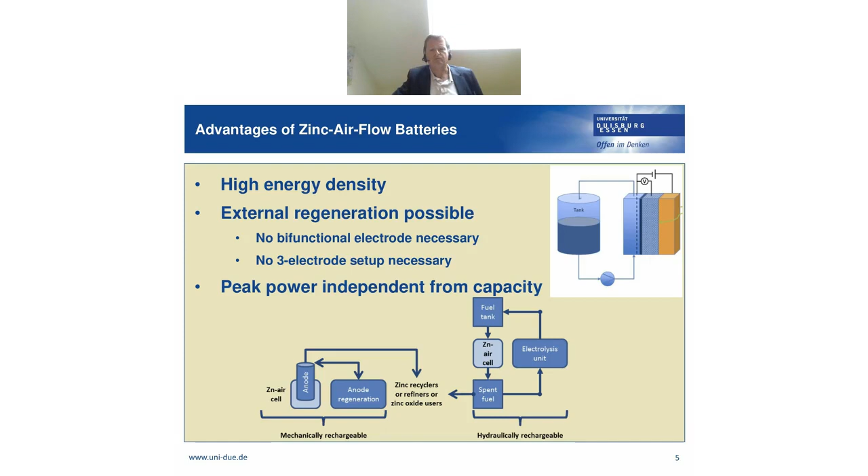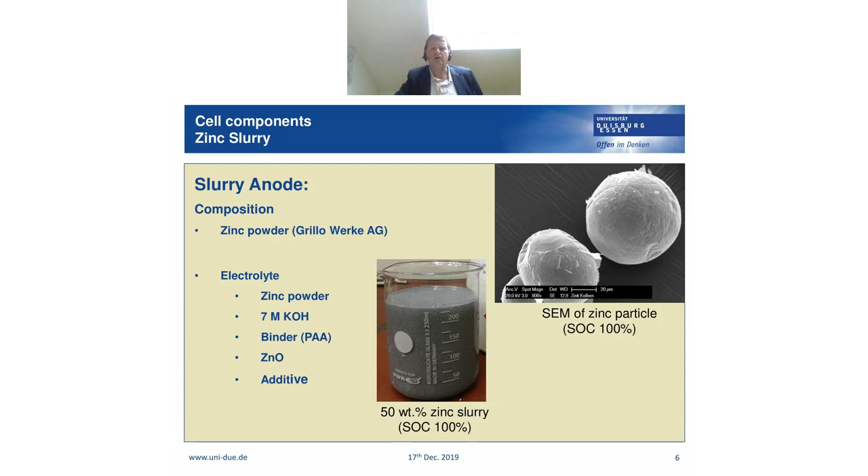Our electrolyte is made up of the zinc powder, and it's an alkaline electrolyte. We mainly use 7 molar potassium hydroxide, and the electrolyte is stabilized with the help of a binder. Mainly we use PAA, polyacrylic acid, and we add some zinc oxide for the purpose of suppressing hydrogen evolution. And sometimes we add one or two additives to improve the performance.

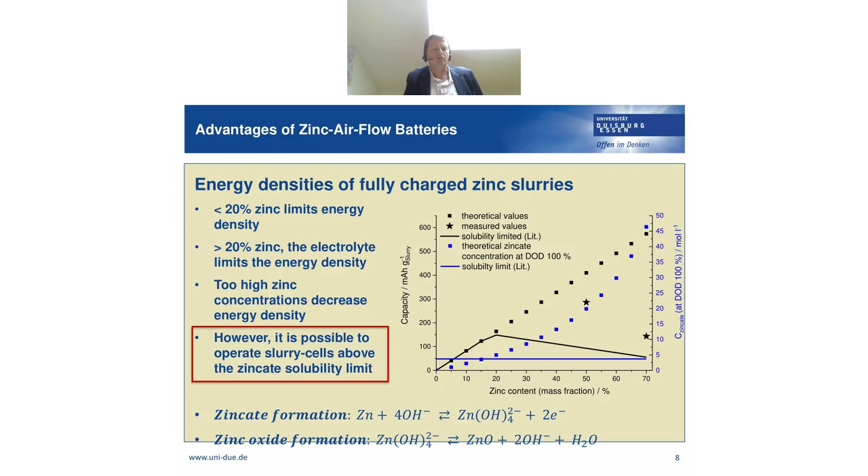So with our zinc slurries with 50 or 70 weight percent zinc, there's so much zincate produced, we cannot keep it in solution. So inevitably, our zincate will precipitate as zinc oxide. And this is really our approach, what we've done here in our group. And I will show you that it is possible to operate slurry cells well above the zincate solubility limit.

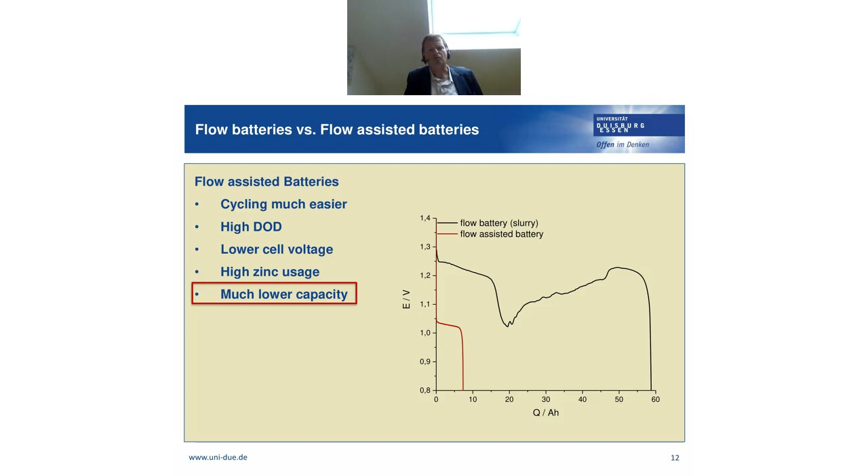And what is most striking, of course, is that the capacity in amp hours is much higher for the flow battery. As I've said to you, we have 50 weight % of zinc in the slurry, and we have, of course, less zinc available for the flow-assisted battery experiment, which is only around 8 amp hours. So this is the advantage of using flow batteries with slurries.

So flow-assisted batteries are easier to cycle. They have a stable discharge voltage, and flow batteries have a much higher energy density. Power and capacity are independent from each other, and they show a higher discharge voltage.

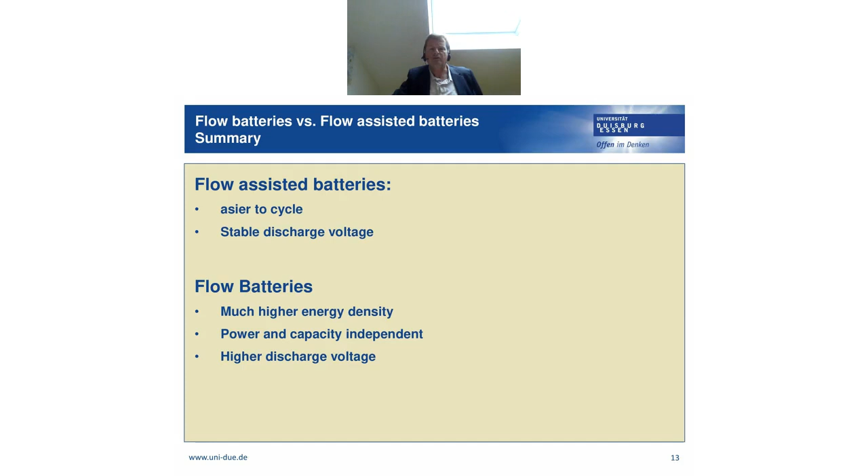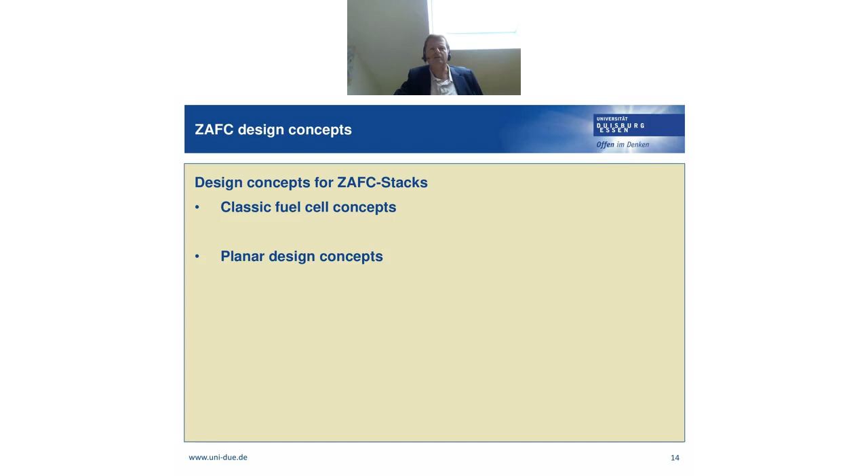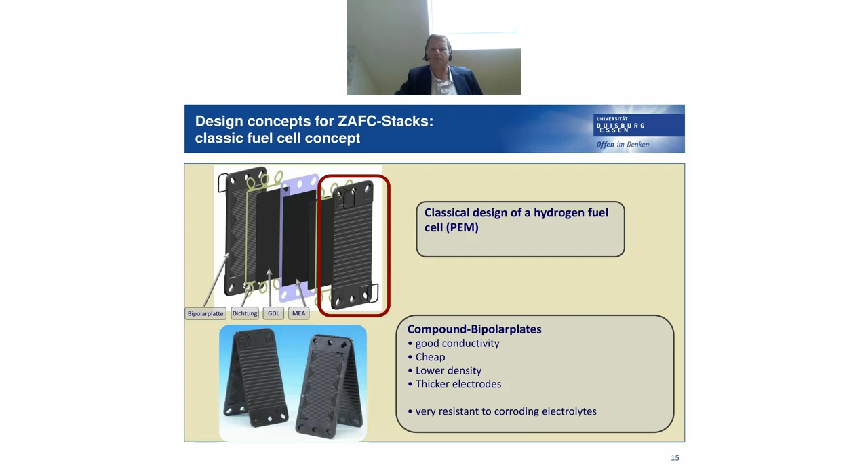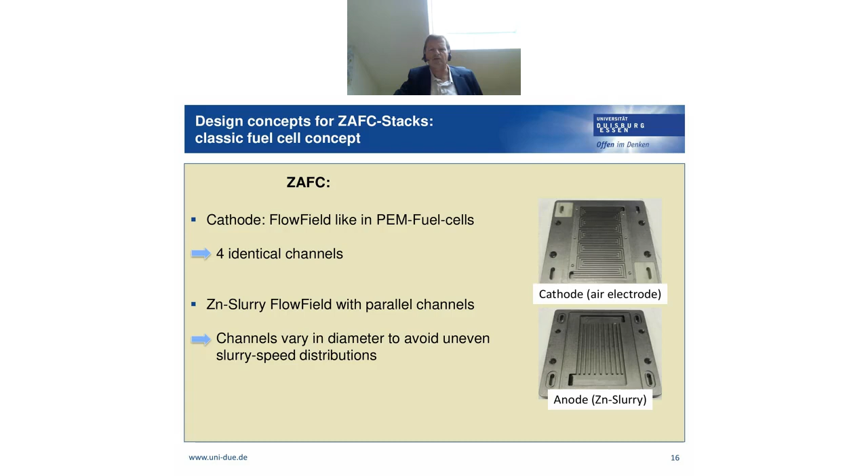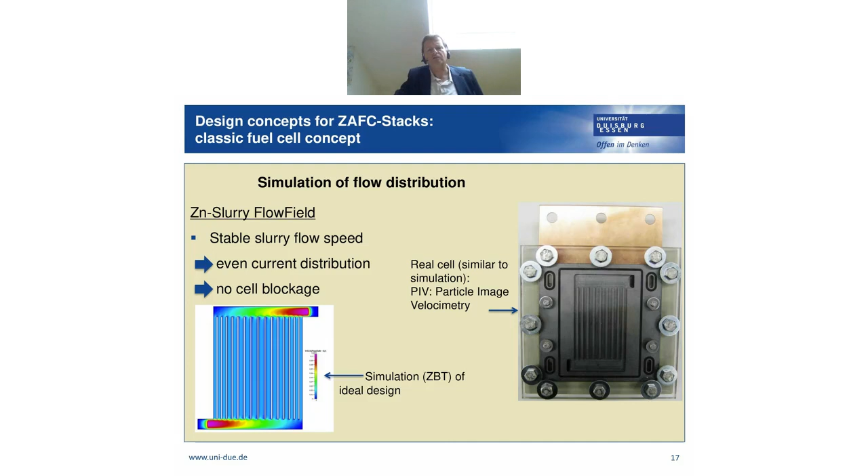We also studied the flow behavior with the help of the technique PIV, which is particle image velocimetry. This means one part, the cathodic part of the cell, is replaced just with a glass plate, and we pump a fluid, not our slurry, through the cell, and into this fluid we give seed particles, and with the help of these seed particles and laser flashes, the movement of these particles through the flow field can be recorded by a camera. So for several geometries, we use the PIV technique.

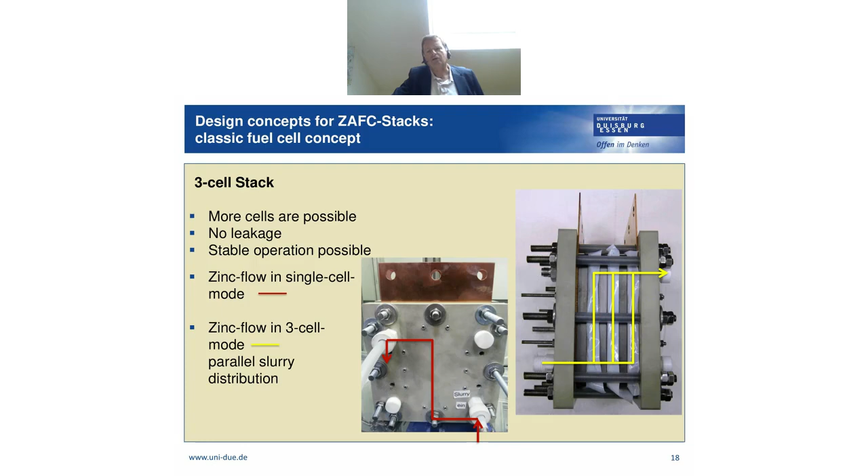Then we built a 3-cell stack with the help of these anodic and cathodic flow fields, and we did not see any leakage and also had a stable operation. And here's depicted how the zinc flows in the single cell mode. Here is the red line with slurry in and slurry out, and on the right photo you see the way the zinc flows through the 3-cell short stack. You can say it's a parallel slurry distribution.

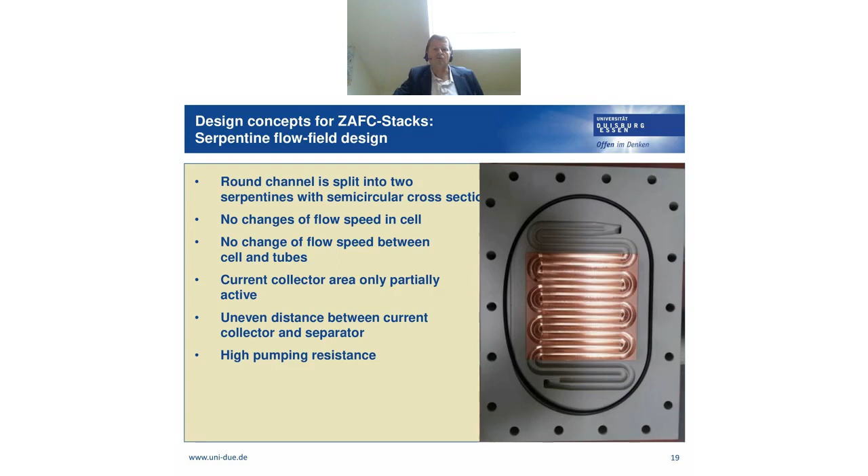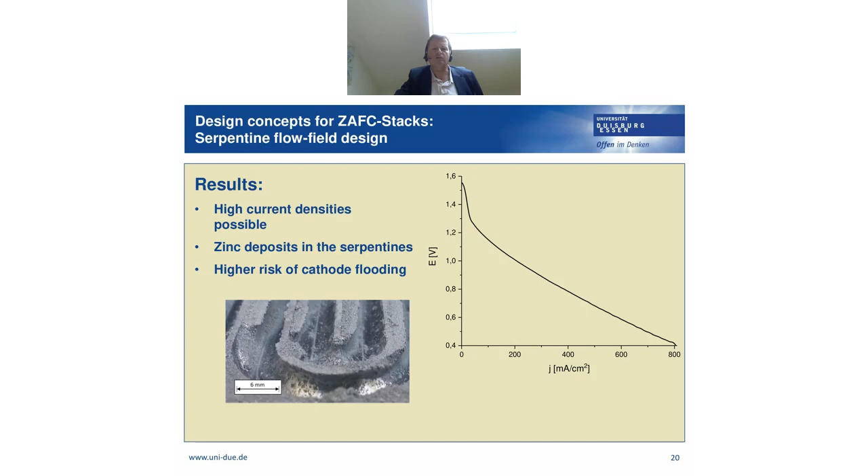There are 2 disadvantages of this serpentine design. We have an uneven distance between the current collector and the separator, which lies just above this flow field. And because of the serpentine structure, we have a relatively high pumping resistance. So here we see a current voltage curve. We can obtain high current densities up to several hundred milliamps per square centimeter, but due to the high pumping resistance, water from the electrolyte is forced through the separator, and it leads to cathode flooding, and the water that is on the cathode side is lacking on the anode side, and this leads to zinc deposits in the serpentine, as you can see here on the picture in the bottom left.

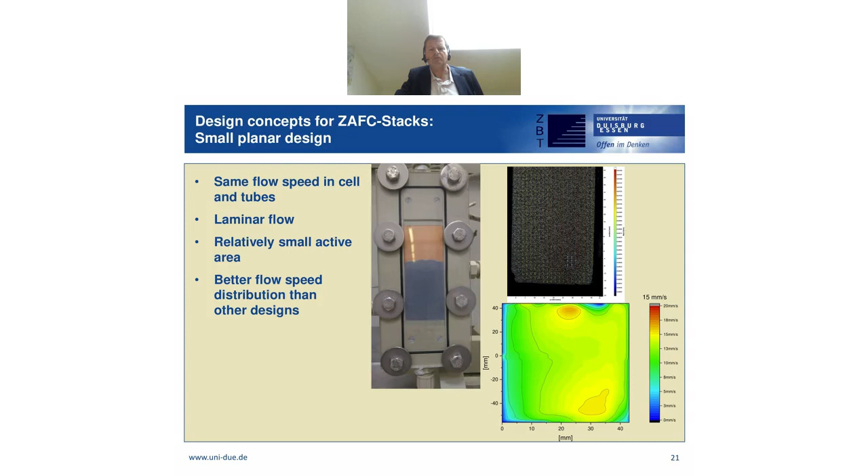We have studied it also with PIV measurements. Again, on the right top picture, you see results from the PIV measurements. If you could look at this picture in detail, you would see a lot of very small velocity vectors, and this is just the output from the PIV measurements. And it is also graphically displayed here in the bottom right, and you can see the different velocities as obtained from the PIV measurements.

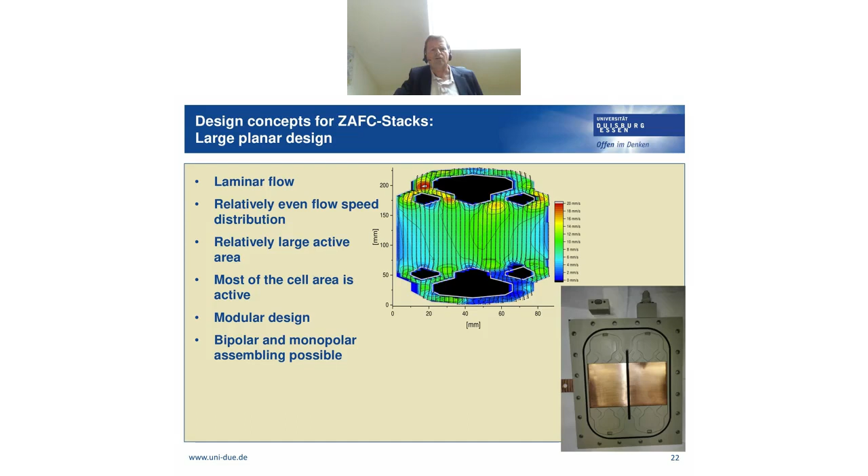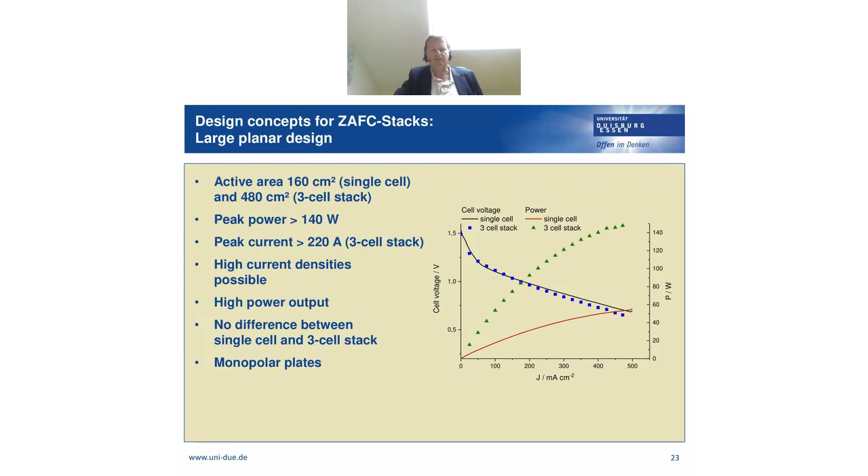So high current densities of several hundred milliamps per square centimeter are possible also in the stacks, and we did not observe a large difference between the single cell and the 3-cell stack performance. So these were some of the cell stacks that we designed, and we also are doing some research on electrolytes. There are some problems of the classic potassium hydroxide electrolytes that are probably well known to you.

One problem is the electrolyte decomposition, which leads to evolution of hydrogen. You probably know that zinc is kinetically stable in KOH, but not thermodynamically. Hydrogen evolution in acid solutions is of course much more pronounced. But even in our alkaline electrolyte, we have some hydrogen evolution, and this is also temperature dependent. In summer, when we have higher temperatures in the lab, we have more gas evolution.

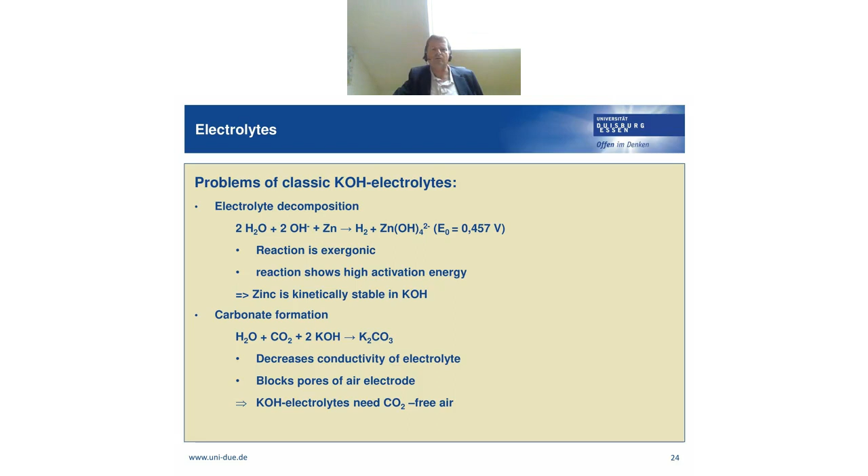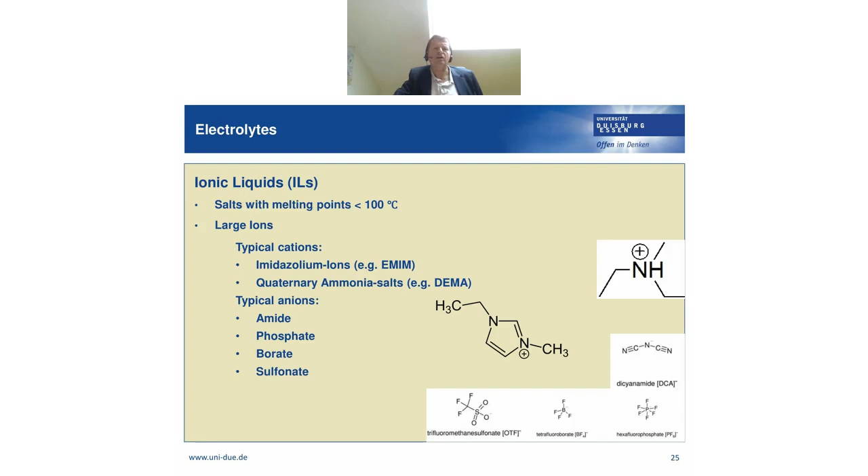And of course, carbonate formation is a well-known problem for the alkaline electrolyte. CO2 is taken up from the atmosphere, and then potassium carbonate forms and blocks the pores of the air electrode. So this was a motivation to look into ionic liquids. We had the chance to get a funded project. Ionic liquids are salts with melting points well below 100 degrees. They are made up of large ions; typical cations and anions are displayed here.

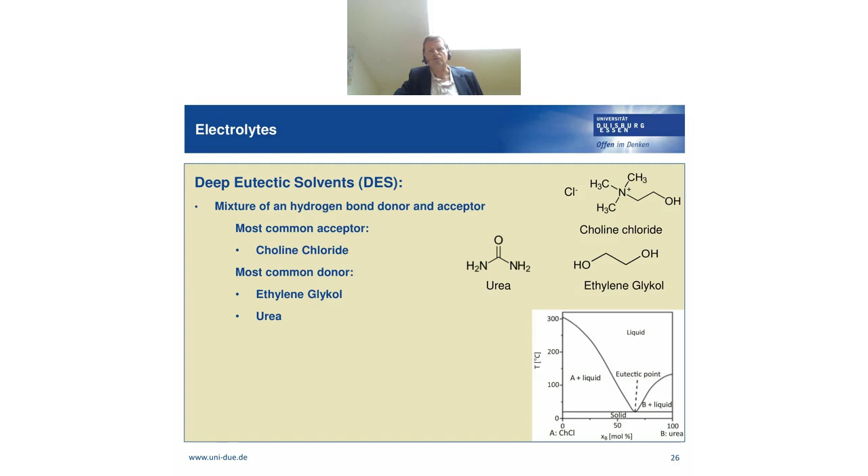But even more interesting are the so-called deep eutectic solvents. We have a mixture of a hydrogen bond donor and an acceptor. The most common acceptor is choline chloride, depicted here on the right side, and the most common donors are ethylene glycol and urea. And we see here a diagram where you see this eutectic point. Here again, you see the different characteristics.

Ionic liquids are, of course, expensive due to low production volume. Sometimes they have unknown toxicity, but they have a large electrochemical window of 4 to 5 volt, which is very favorable. DES have a somewhat smaller electrochemical window, but it's still big enough for our zinc air cell, which has an open circuit voltage of 1.6, 1.7 volt. DES chemicals are well known. Generally, they're non-toxic and also biodegradable.

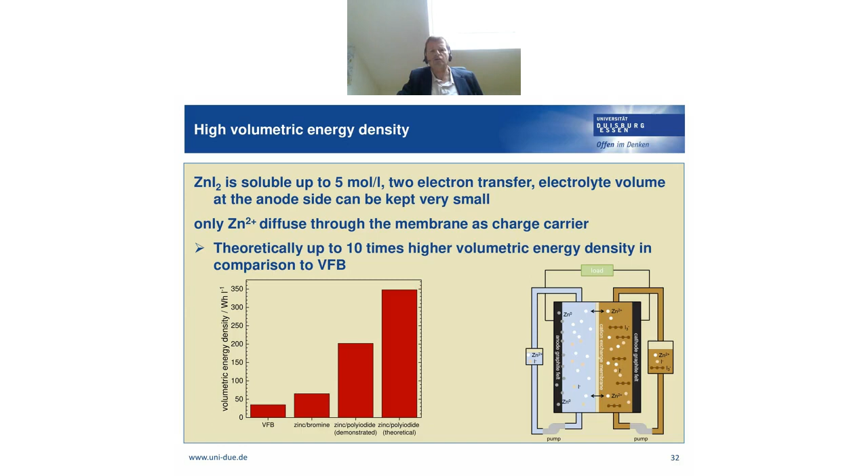So the electrolyte is composed of zinc iodide, and when you try to solve zinc iodide, this leads to colorless precipitates. Zinc oxide is formed a little bit, which can be seen here on the right side. So you need an additive to dissolve the zinc oxide properly. And one of these additives is ammonium chloride.

It complexes the zinc ions in different complexes and really improves the cycling behavior. We see it here in the graph on the left side. We have on the left axis a capacity in amp-hours per liter, and then we see here the cycles, up to 45 cycles, as a function of the amount of ammonium chloride. And once we add 1 or 2 moles of ammonium chloride, we can obtain 40-45 cycles.

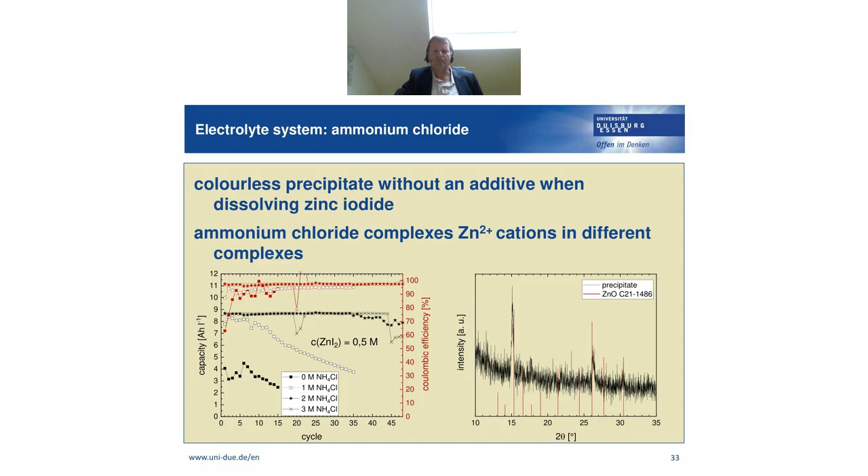It is interesting to note that in the triiodide ion, iodine, here in yellow you see the iodine molecule, is stabilized, and this really wastes one ion of iodide. So if we take, for example, zinc bromide, then iodine can be stabilized as I2Br minus. The molecule is here depicted in the middle. And like this, we can really unlock the full capacity, which is shown here qualitatively on the picture on the right top: when we can complex the ion with the bromine, then we can really oxidize and reduce all of the iodine.

So our electrolyte then is composed, for example, of zinc iodide, of zinc bromide, and of ammonium chloride. Like this, the capacity, or you can say the energy density, is increased, which is shown here in the voltage capacity curve on the left. We have here the red discharge curve, for example, where we have a capacity of 12 amp hours per liter upon adding zinc bromide, and without zinc bromide we have here around 9 amp hours per liter.

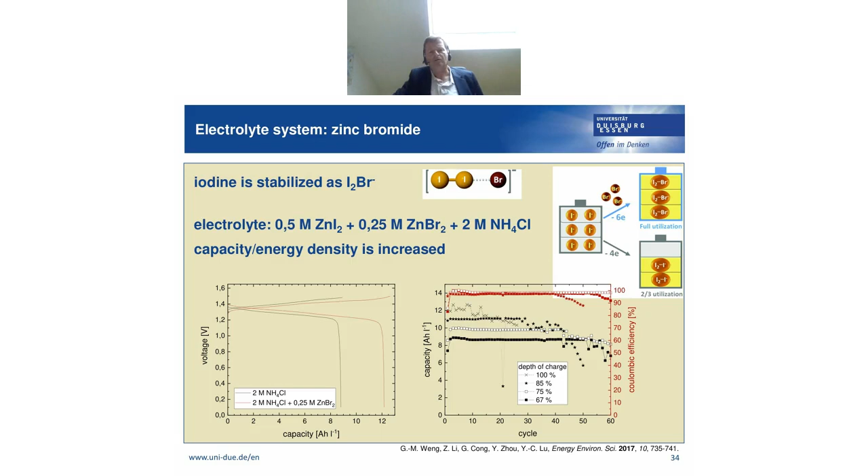So the question for us is which side, the anode or the cathode side, is really limiting the performance at the moment. So we devised some half-cell experiments. I will show you here one experiment for the polyiodide side. We use a zinc foam as anode material, and this acts as a zinc reservoir that can be dissolved during discharging instead of the zinc deposit from the charging. So like this, we can eliminate the zinc half cell, so to say, and only concentrate on the polyiodide side.

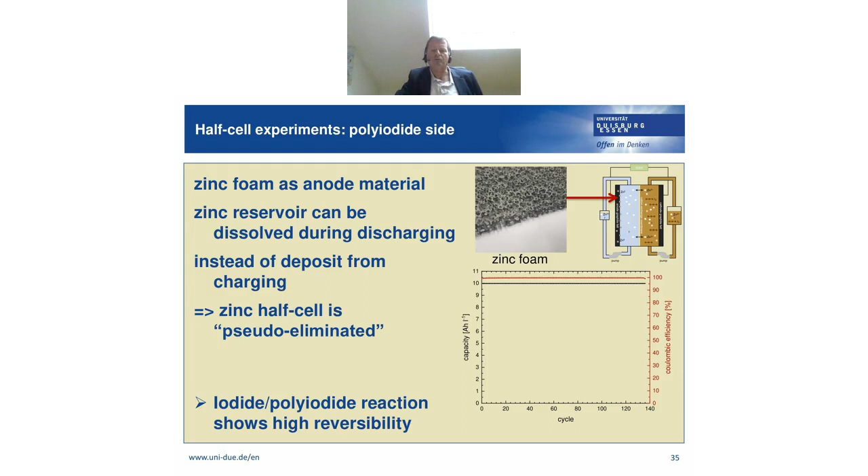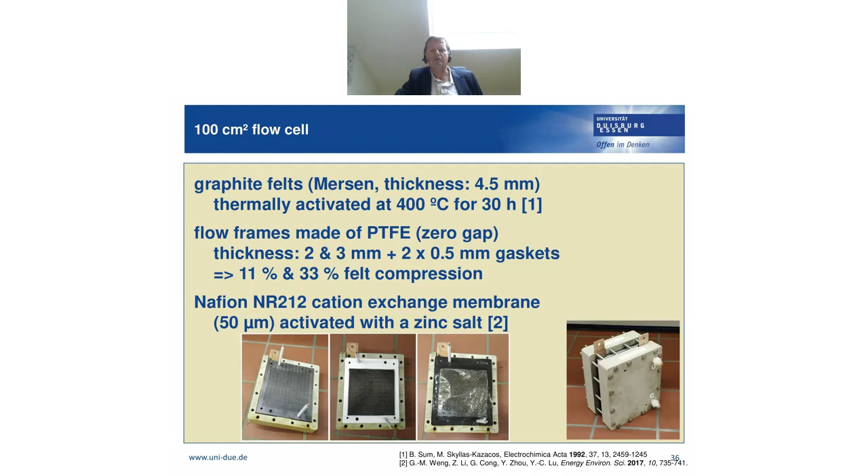What we've done next is constructing a 100 square centimeter flow cell with graphite felts as the electrodes and catalysts, so to say, flow frames made of PTFE, and the cation exchange membrane from Nafion. We designed also 3 different flow fields. The simplest one is a flow-through design, and then we have interdigitated designs and serpentine flow fields, which is here depicted in the table. I cannot go to all the details now.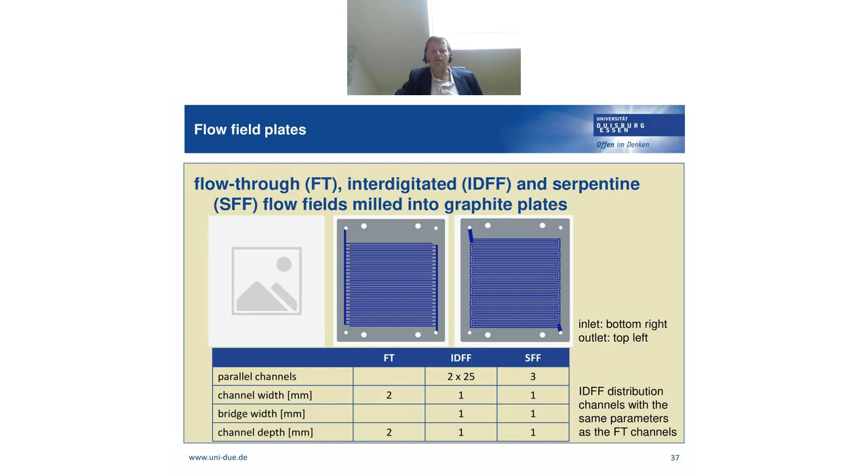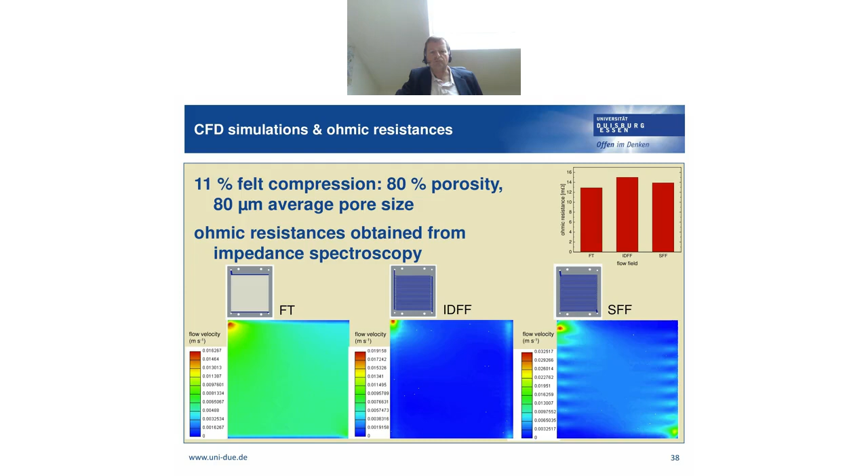We did some simulations on the flow velocity distribution for the 3 flow field designs. We did measurements of the ohmic resistance with the help of impedance spectroscopy. And you can see here qualitatively in the 3 simulation diagrams the flow velocity distribution.

Then we raised the concentration of the zinc iodide. In all of the experiments that you've seen so far, we only used 0.5 moles zinc iodide. Now we used here 2.5 moles of zinc iodide plus ammonium bromide, ammonium for the zinc complexation and bromide for the iodine complexation, and this can be combined in one compound.

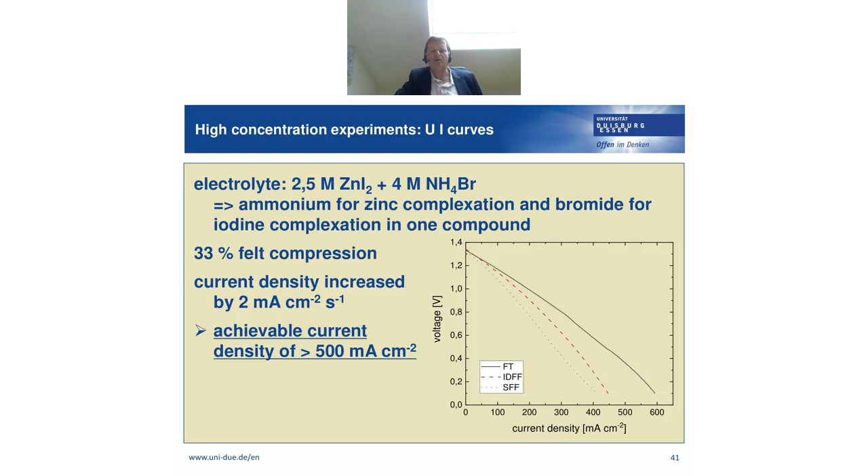We did some cycle experiments, charge-discharge cycles with a high concentration. And as you can see here, again, we could obtain more than 50 cycles, but the coulombic efficiency is lower compared to the experiments with a lower concentration. So there's still really some room for improvement.

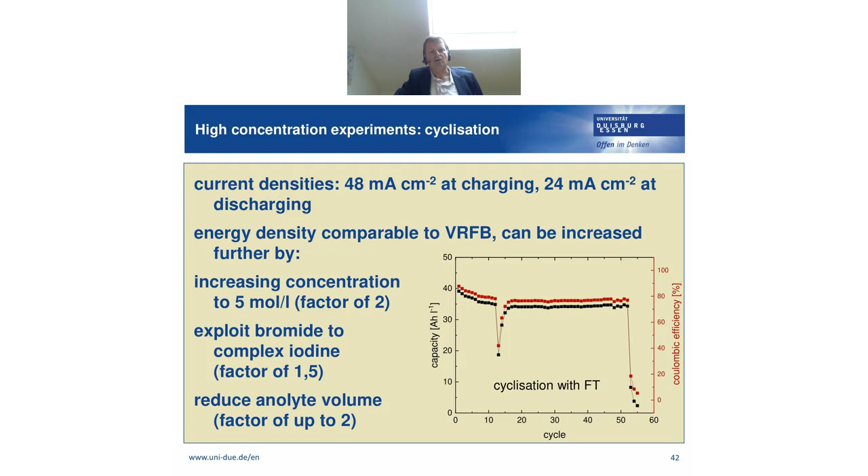As I've pointed out before, we can still, in principle, increase the concentration up to 5 moles per liter. We can exploit bromide to complex iodine and reduce the anolyte volume to achieve higher energy densities.

So in summary, this zinc polyiodide redox battery is really interesting because of the high volumetric energy density. We tested here 3 different flow field types, and interestingly, the simplest flow field, the flow-through design, gave the best results. We obtained quite high current densities, which makes it in principle attractive.

The goal, from my point of view, would be a flow battery that can operate with a current density of around 200 milliamps per square centimeter. But of course, the reversibility, and we think especially on the zinc side, has to be optimized. So this is really the point where we do a lot of experiments right now.

And of course, a little bit larger stack is under construction. We build a stack based on an active area of 250 square centimeters, and we will show a 5 or 10 cell stack of this size.